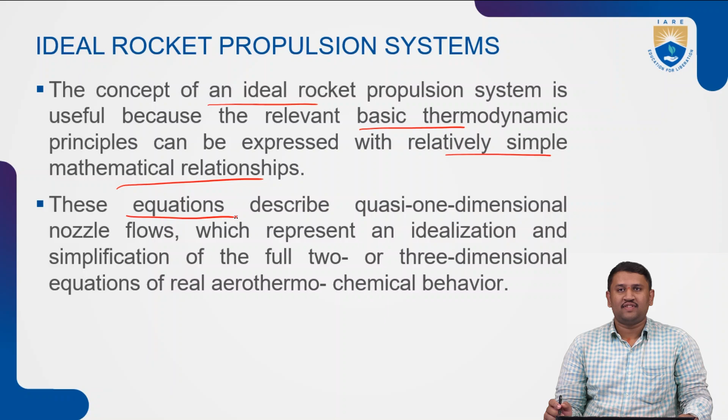Now, these equations which describe quasi one-dimensional nozzle flows, if applied for a nozzle, will describe quasi 1D flows, and which represent a simplified idealization for a full 2 or 3 dimensional equations of real aerothermochemical behavior.

This term is basically air, heat and chemical. We are combining all three separate terms in order to understand the complex nature of your rockets, particularly nozzle reactions or nozzle flows, by considering a 1D state. Now, upon getting a 1D, you can just integrate the same over a period, over a dimension, in order to get a 2 or 3 dimensional equational form.

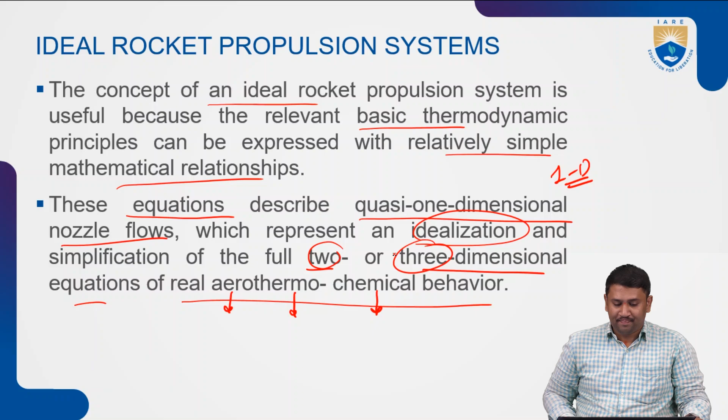Now, first, an ideal rocket, particularly rocket propulsion unit, is defined as one for which the following assumptions are valid. So first one will be the working fluid, which actually consists of chemical reaction products. We are considering a nozzle.

A nozzle in which some flow occurs. Flow is basically of a particular fluid, in our case a gas. Now gas, if you are breaking up clearly in more realistic way, a gas is nothing but my exhaust products.

Particularly chemical reaction products. So now the working fluid, particularly the chemical reaction products, should be homogeneous in composition. It means the composition around the section of a nozzle, or the area through which we are considering, should be the same.

Next, all species of the working fluid are treated as gaseous. Any condensed phase, particularly liquid or solid, adds negligible amount of total mass. Now, the working fluid in our case, which is nothing but our chemical reaction products, is considered as gaseous phase because upon combustion they are high pressure plus high temperature gases which are expelled through the nozzle, or expelled from the combustion chamber.

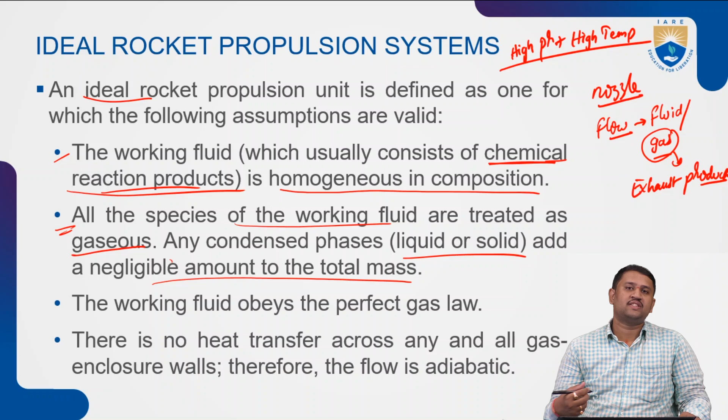Now, upon combustion, these products, particularly the fuel, whatever fuel you are using, for example liquid hydrogen or jet propellant or any other, and the oxidizer, particularly oxygen, both upon combustion will convert themselves into gaseous form. This gaseous form is a valid assumption that we are making for considering an ideal rocket propulsion.

Next, and one more thing, if any condensed phase occurs, for example, any certain combination of rocket fuel, particularly liquid oxidizer as well as fuel, will be giving out some amount of condensed phases like liquid or solid phases of the material. So that will be considered as only a negligible amount to the total mass or total exhaust products that are being generated.

Next, the working fluid, in our case the combustion reacting products, must obey the perfect gas law accordingly.

Next, there is no heat transfer across all gas enclosure walls. Therefore, the flow is adiabatic. Adiabatic, in our terms, is basically there is no exchange of heat.

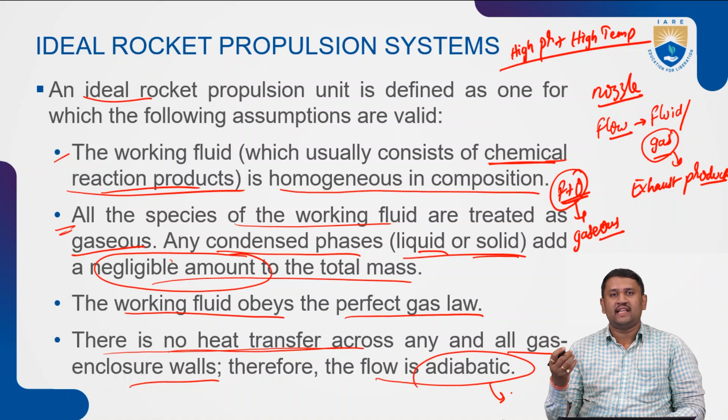Now, let us consider a simple example. In a simple nozzle, while performing 1D analysis, we are not considering the material through which the nozzle is made, but we are assuming that there is no heat transfer taking place, so that whatever energy is created at the beginning of the combustion chamber or beginning of the nozzle is the same at the end of the nozzle also.

Coming to the next assumption: there is no appreciable wall friction, and all boundary layer effects may be neglected. There are no shock waves or other discontinuities within the nozzle flow. Whatever shock waves are there, are formed outside of the nozzle in general, whereas the discontinuity is the only one formed while creating a CD nozzle.

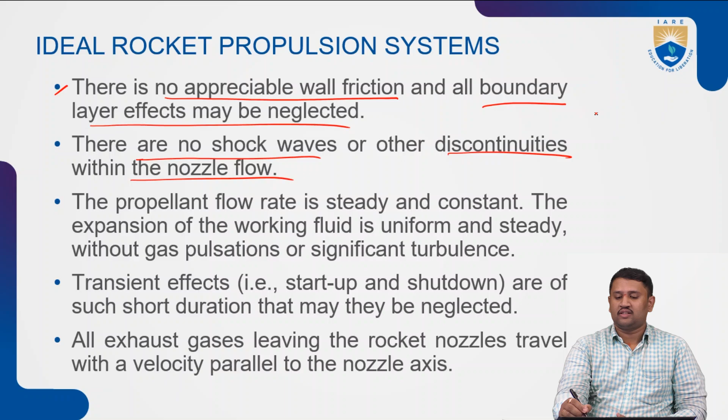A single discontinuity, called the throat, will be available in order to maximize my flow velocity. Regarding maximization of flow velocity, we have discussed already in the previous class. So next, continue with the same.

The propellant flow rate, which is steady as well as constant, and the expansion of the working fluid, particularly the chemical products, must be uniform and steady without gas pulsations or any turbulence. Starting from the nozzle, the flow should be continuous. There should be no intermediate stop, no sudden pulses of gas injection or gas modification.

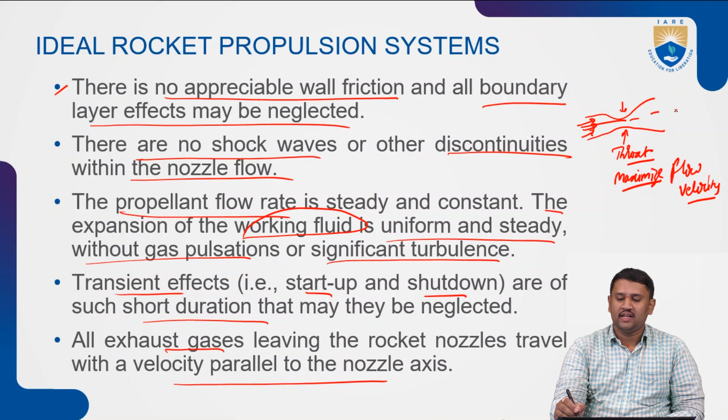Next, the transient effects, particularly during startup and shutdown, are of such short duration that they have to be neglected. All exhaust gases leaving the rocket nozzle travel with velocity parallel to the nozzle axis, and this will be my nozzle axis.

Now, few more assumptions: the gas velocity, pressure, temperature and density are uniform across any section normal to the nozzle axis. For example, if you're considering this as a CD nozzle...

This is the flow. Now, during this flow, what happens? Basically, the gas velocity, pressure, temperature and density are all uniform across any section normal to the nozzle axis. If you're taking n number of sections anywhere, the values of velocity, pressure, temperature and density are the same. That we are assuming.

Next, the chemical equilibrium. The chemical equilibrium is established within the preceding combustion chamber, and the gas composition does not change in the nozzle, which also means the frozen composition flow.

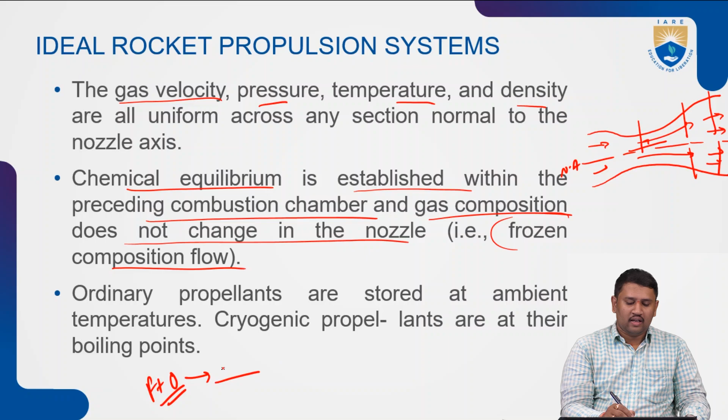Now, whatever the chemical equilibrium is—whatever fuel plus oxidizer we are burning, any kind of fuel and liquid oxygen—upon burning you will be getting certain amounts of products, particularly NOx products, sulfur products, CO, and a few more others.

When upon combustion of fuel and oxidizer, whatever composition you get as a byproduct of the combustion, that remains the same throughout the complete nozzle system. The gas composition, particularly this product, will be the same according to the length of the nozzle. It means there is no change—whatever you are getting out of the combustion is directly sent out through the nozzle as part of expansion. This particular flow is called frozen composition flow.

Now, one more assumption that we are making is ordinary propellants. Ordinary propellants are stored at ambient temperatures, whereas cryogenic propellants are at their boiling points. Let us understand this.

Any propellant, particularly fuel plus oxidizer, can be stored at their respective storage points, before their evaporation or boiling points. Whereas cryogenic propellants, let's say liquid hydrogen as well as oxygen—we'll skip oxygen for now—hydrogen is a type of cryogenic propellant which is at gaseous state at ambient temperature.

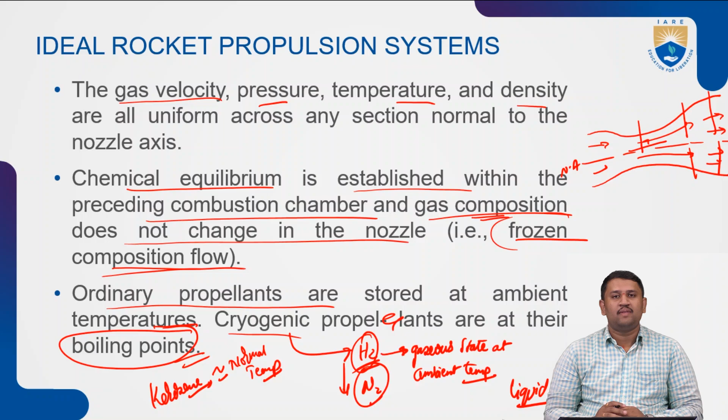Can be stored easily, whereas cryogenic propellants required a special area, special casing to hold them together at a specified temperature well below their respective boiling points. Now, based on these assumptions, we can derive a relatively small, quasi one-dimensional set of equations in order to determine our flow.

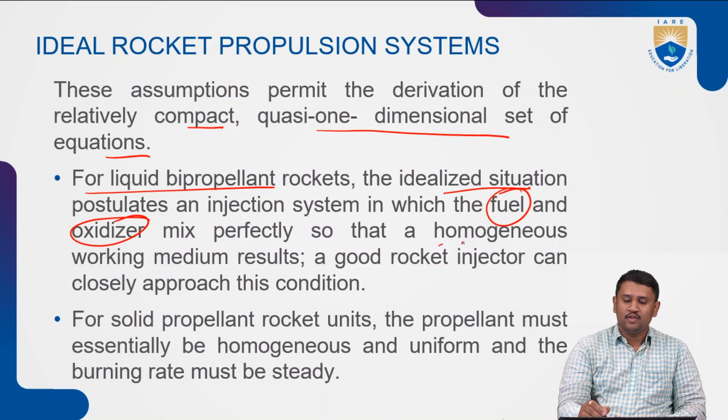For a liquid propellant or bipropellant rocket system, an idealized situation postulates an injection system in which fuel as well as oxidizer mix perfectly, meaning the proportions are in stoichiometric form, so that a homogeneous working medium results. A good rocket injector can closely approach this condition. Getting a good stoichiometric ratio is feasible, but getting a good homogeneous working medium, particularly of the exhaust products, is somewhat harder. So the way you inject the fuel and oxidizer, and at what angle, determines how closely you approach the required condition.

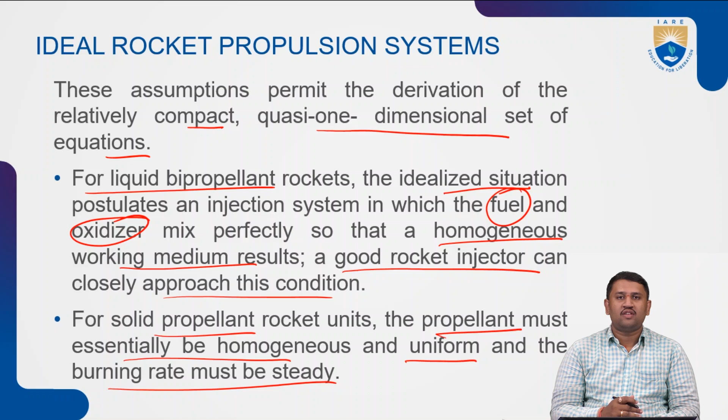Whereas for solid propellant rocket units, the propellant must essentially be homogeneous as well as uniform. The burning rate must be steady in order to have a constant flow of exhaust products through the nozzle.

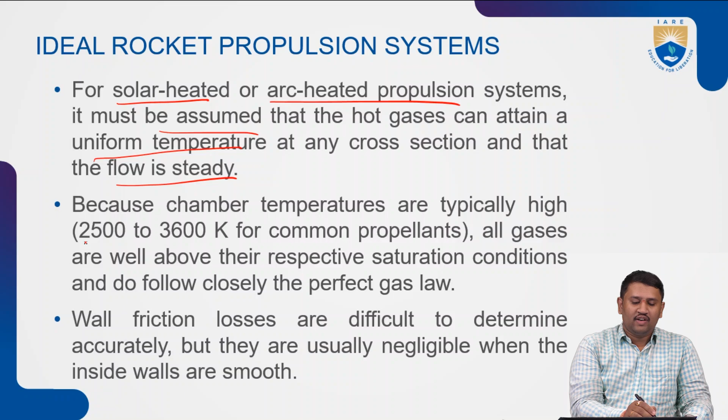Now, similarly, for any solar heated or arc heated propulsion systems, which are the trending technologies now, it must be assumed that the hot gases can attain a uniform temperature at any cross section if the flow is steady, because the chamber temperatures are typically 2500 to 3600 Kelvin for common propellants, and all gases above their respective saturation conditions will follow the perfect gas law.

Wall friction losses are difficult to determine accurately but they are usually negligible when the inside of the walls is smooth. If we are designing the walls of a nozzle to be serrated or curved in nature, then we must consider the wall frictional losses.

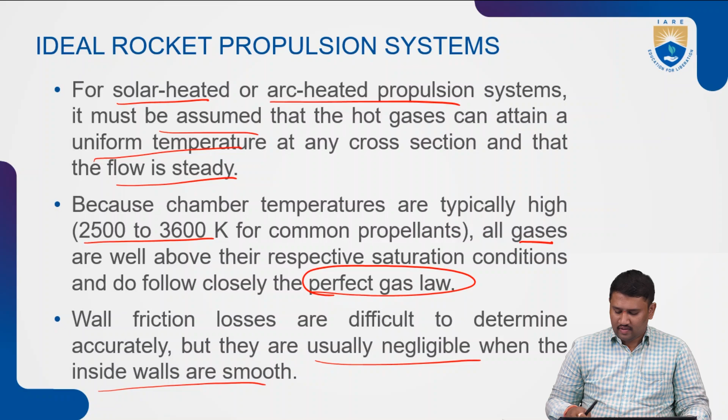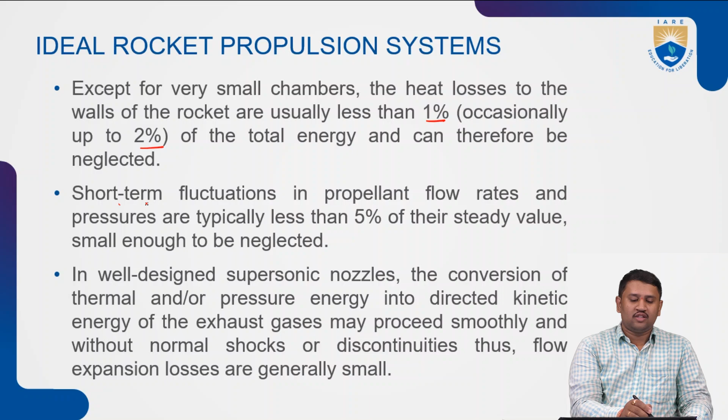Now, except for very small rocket chambers, the heat loss through the walls is usually less than 1%, occasionally up to 2%, of the total energy and can therefore be neglected. Short-term fluctuations in propellant flow rates, typically less than 5% of the steady value, are small enough to be neglected. In a well-designed supersonic nozzle, the conversion of thermal or pressure energy into directed kinetic energy of exhaust gases may proceed smoothly without normal shocks or discontinuities. Thus, flow expansion losses are generally small.

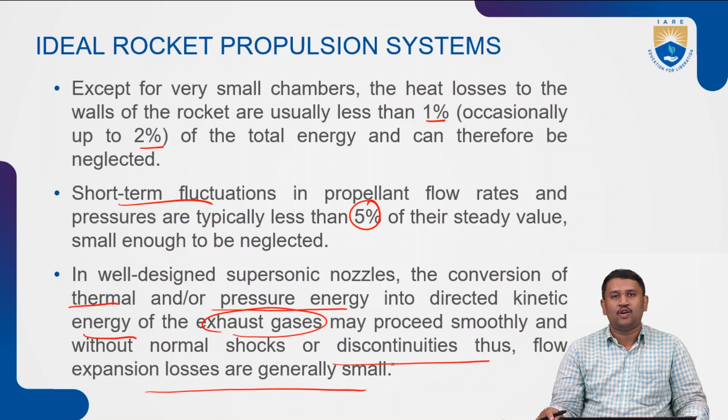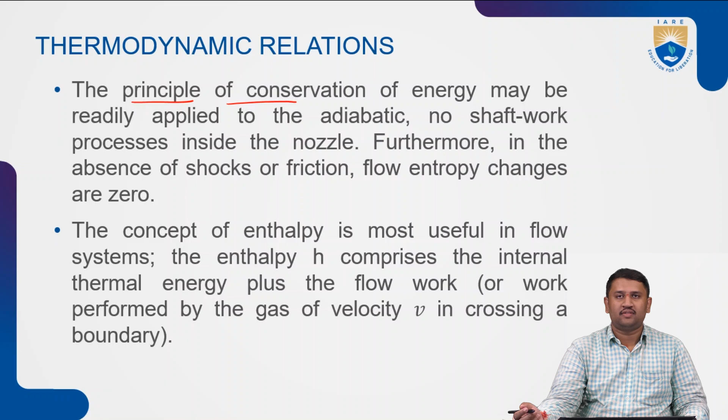Now, continuing, we will glance at the thermodynamic equations and relations in order to determine isentropic flow through the nozzle. First we will understand the conservation forms, then derive the equation. Considering the principle of energy, readily applied to an adiabatic process, which is one of our assumptions, where no shaft work occurs inside the nozzle, and furthermore in the absence of shocks or friction, the flow entropy change is zero.

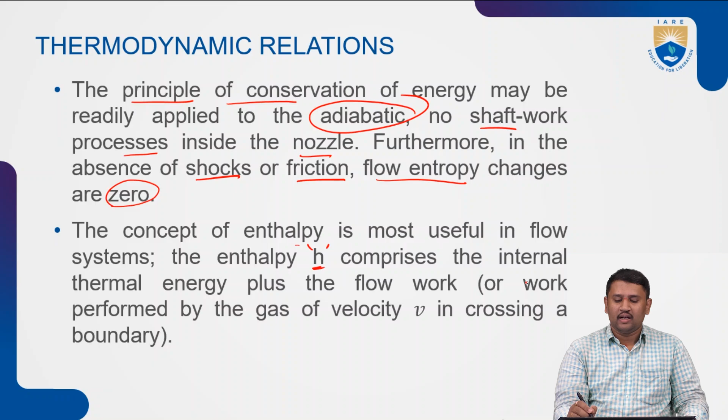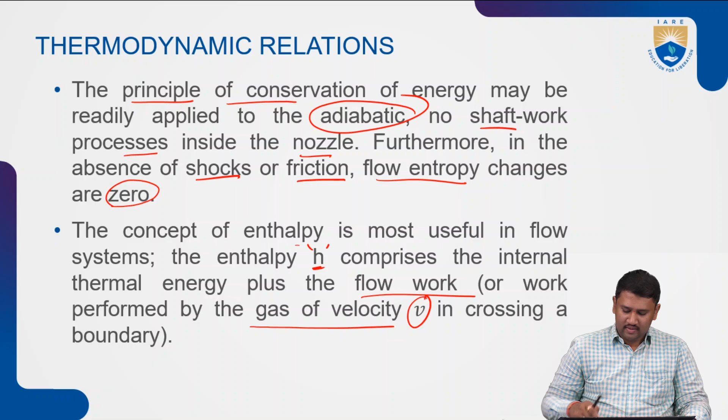Now, the concept of enthalpy is most useful in flow systems. The enthalpy H comprises the internal thermal energy plus the flow work, the work performed by the gas velocity in crossing the boundary. For ideal gases, the enthalpy can conveniently be expressed as the product of specific heat Cp and absolute temperature, where Cp is the specific heat at constant pressure, also defined as the partial derivative of enthalpy with respect to temperature at constant pressure.

Now, under the above assumptions, the total or stagnation enthalpy per unit mass, denoted by H naught, remains constant: H naught equals H plus V squared by 2J, which is again constant. Here H naught is the stagnation enthalpy, H is the simple enthalpy, and V squared by 2J is nothing but half V squared into J, which is the kinetic energy being generated.

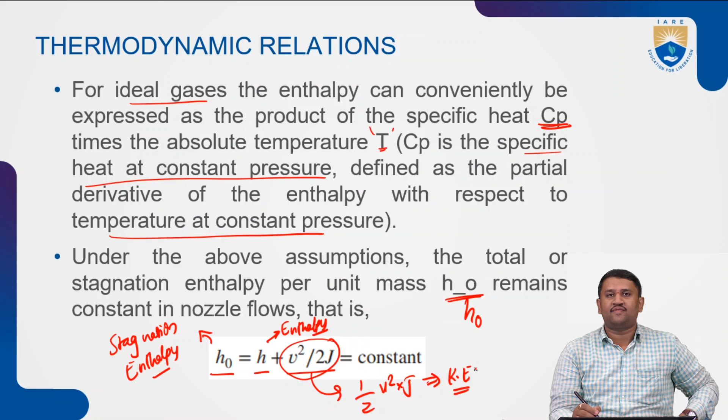Now, by considering the conservation of energy applied to an isentropic flow between any two nozzle axial sections, X as well as Y, the decrease in static enthalpy or the thermodynamic content of the flow appears as the increase in kinetic energy, since any changes in potential energy may be neglected. So differentiating, or taking a small difference between the enthalpy at section X and Y, what do we get? The change in kinetic energy, let me explain.

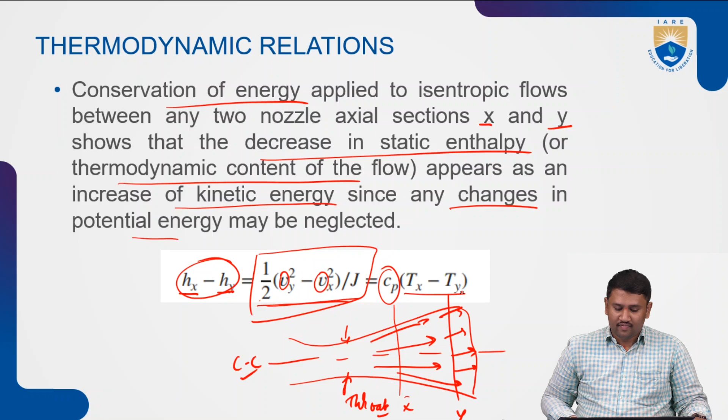Now, the principle of conservation of mass in a steady flow for passages with a single inlet and a single outlet is expressed by equating the mass flow rate m dot at any section X to any section Y. This is known as the mathematical form of the continuity equation.

Now let's understand this. As per the principle of conservation of mass, whatever mass enters through section X, the same mass is supposed to exit section Y, which is nothing but a form of continuity.

Now, in what way it changes, we will see. This can be written in terms of the cross-sectional area and the velocity at which it is passing through, and the specific volume, meaning volume divided by mass at any section. The mass flow rate at section X should equal that at section Y, which is also equal to AV by V, where A is the cross-sectional area, V is the flow velocity, and capital V is the specific volume.

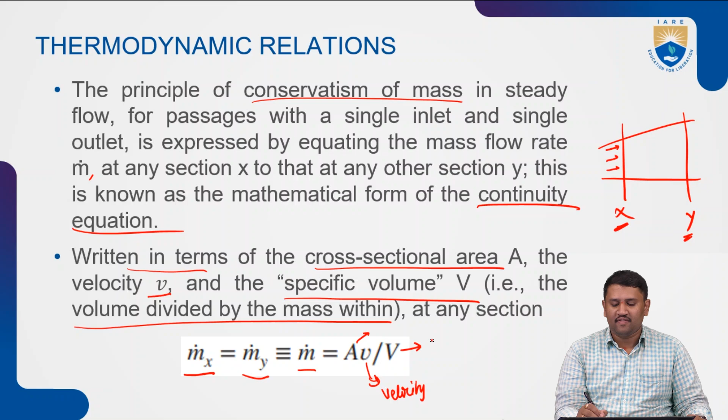Now, the perfect gas law can be written at an arbitrary location as PV equals RT, where R is the gas constant, found from the universal gas constant R dash divided by the molecular mass of the flowing gas mixture. The molecular mass of the flowing gas depends on the products of combustion. R is constant, R dash is constant. Now what varies? Basically the pressure, the volume, and the temperature.

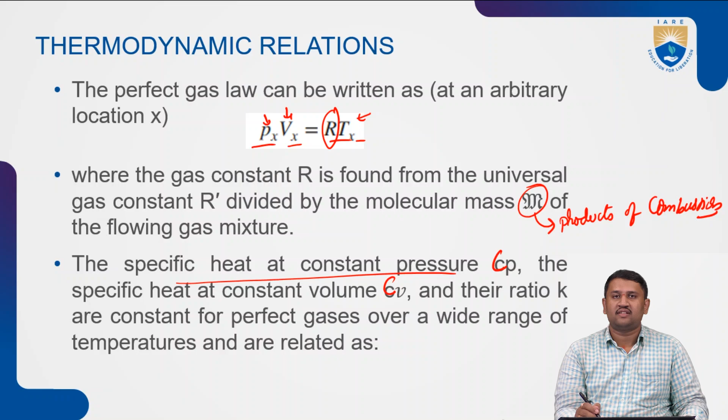Now, the specific heat at constant pressure, denoted by Cp, and the specific heat at constant volume, denoted by Cv, and their ratio K, are constant for a perfect gas over a wide range of temperatures, related as K equals Cp by Cv. Again, rewriting this, Cp minus Cv equals R by J, or Cp equals KR by K minus 1 into J.

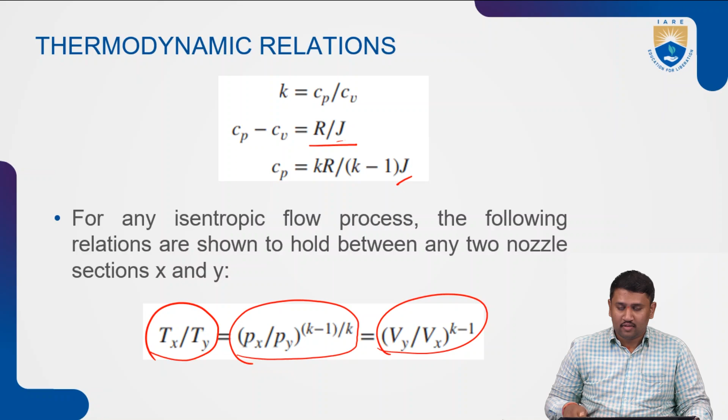For any isentropic flow process, the following relations hold between any two sections of a nozzle: the temperature ratio for two separate sections equals the pressure ratio, which also equals the specific volume ratio. These relate any two sections of a nozzle, taken from the above equations. Now rewriting the same, during isentropic expansion, the pressure drops, and the absolute temperature also drops somewhat less, so the specific volume increases when flow is expanded isentropically.

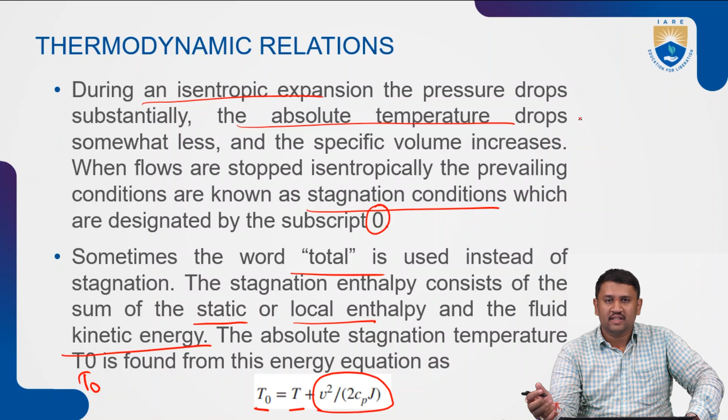Then the prevailing conditions are known as stagnation conditions, designated by subscript 0, and sometimes total is used instead of stagnation. The stagnation enthalpy consists of the sum of the static or local enthalpy and the fluid kinetic energy. The absolute stagnation temperature, T naught, is found from this energy equation, equals T plus V squared by 2 Cp J. Now let me glance at this data. You will be having a generalized condition, particularly temperature. In any isentropic expansion, what happens?

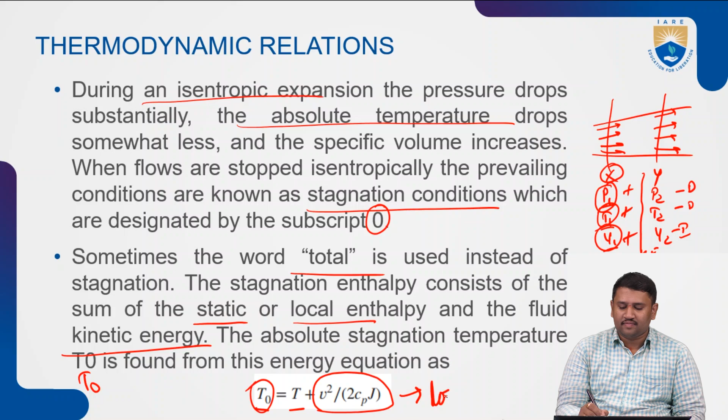In our case, for example, T naught can also be called as stagnation temperature or the total temperature at a particular location. And similar to this, T is my static absolute fluid temperature, and in adiabatic flows the stagnation temperature remains constant. And a useful relationship between the stagnation pressure and the local pressure in isentropic flows can be written as P naught by P is equals to.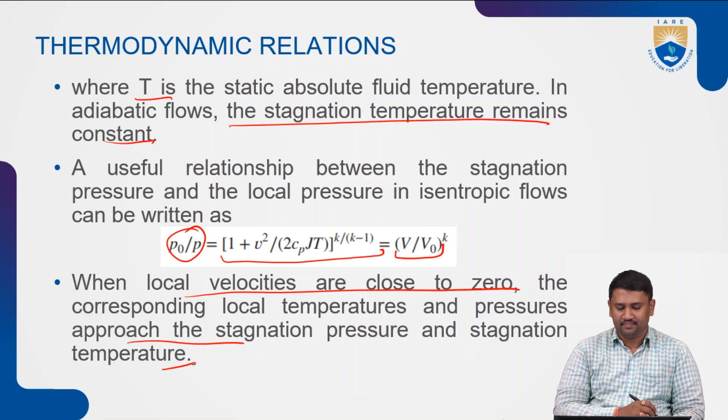Now, inside the combustion chamber, where gas velocities are typically small, the local combustion pressure is essentially equal to the stagnation pressure. Now, the velocity of sound, also known as the acoustic velocity, in perfect gases is independent of the pressure.

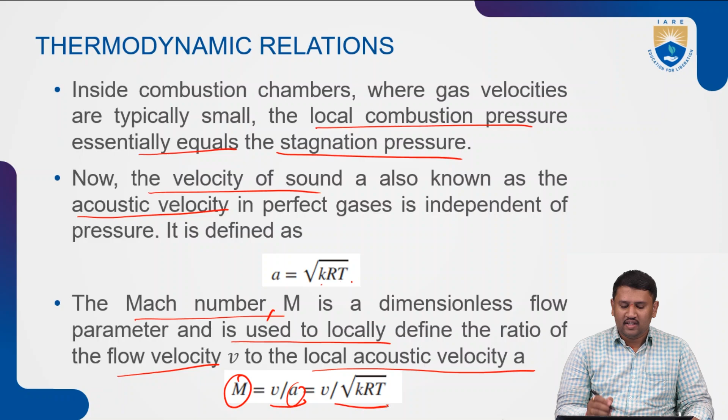This is also defined as A equals to root of KRT, where a Mach number M is a dimensionless flow parameter and is used to locally define the ratio of the flow velocity and local acoustic velocity, which is denoted by capital M equals V by A, where A, again the acoustic velocity, is rewritten in terms of square root of kRT.

Now, Mach numbers less than 1 correspond to subsonic flows, whereas Mach numbers greater than 1 correspond to supersonic flows, and the flows that are moving precisely at the velocity of sound would have Mach number equal to 1. At the throat of all one-dimensional supersonic nozzles, the Mach number must be equal to 1.

The relation between the stagnation temperature and Mach number can also be rewritten as T naught equals to T into this bracket form, where we are substituting the data towards your stagnation temperature.

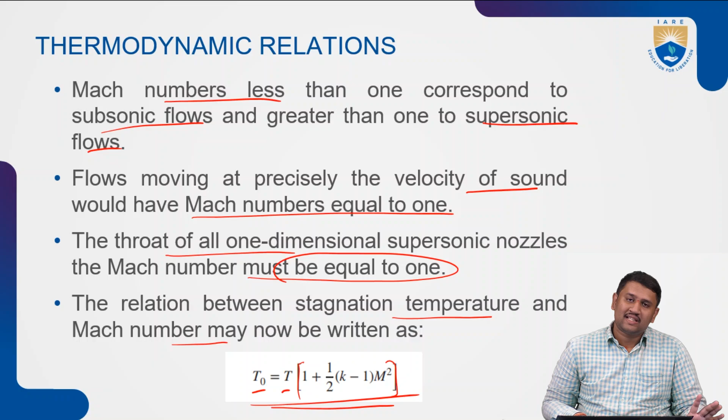Now, the previous equation in terms of this can also be rewritten to find out the Mach number as square root of 2 by k minus 1 into T naught by T minus 1, where T naught and P naught are designations of your temperature as well as pressure stagnation values, or the total values.

Unlike the temperature, the stagnation pressure during the adiabatic nozzle expansion only remains constant for total isentropic flows. It means there are no losses of any kind. It can be computed from P naught equals to P in this form.

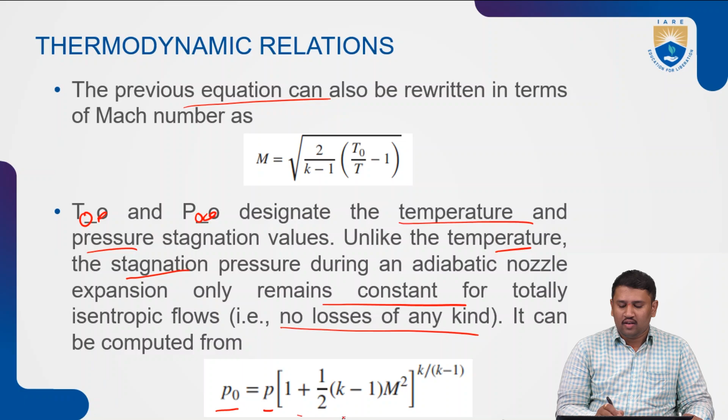Now, the nozzle area ratio, which we discussed earlier, for an isentropic flow may now be expressed in terms of Mach numbers for two arbitrary locations, that is x and y, within the nozzle, and such relationships are plotted with mx, that is Mach 1, where ax is nothing but the throat or the minimum area along with the corresponding ratios T by T naught and P by P naught.

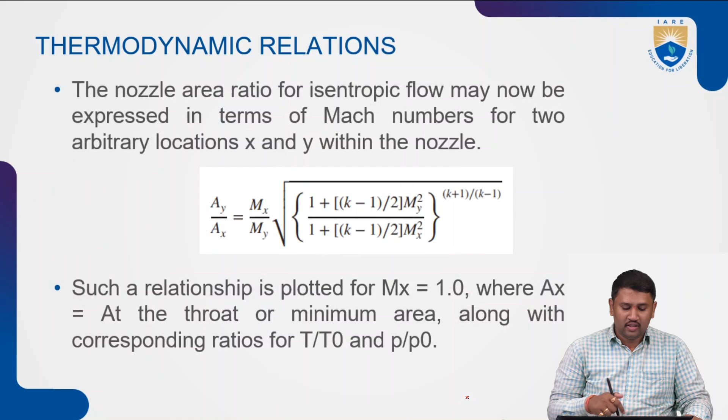Now, this is one of the plots that is being plotted with respect to this to find out. This graph shows the area ratio, particularly AX by AY, the pressure ratio P by P naught, and the temperature ratio T by T naught as functions of Mach number. It means M equals mx by my.

Now what happens under this? Mach number 1, what we have studied till now, any Mach number below 1 will be considered as subsonic, above as supersonic. Now understanding this, Mach 1, which is the maximum amount of flow, that occurs only at the throat.

Now try to understand, this particular region separates my sonic sections, particularly the CD nozzle, into a convergent section and a divergent section. Now in this case, what we'll see is basically first we'll understand the area ratios.

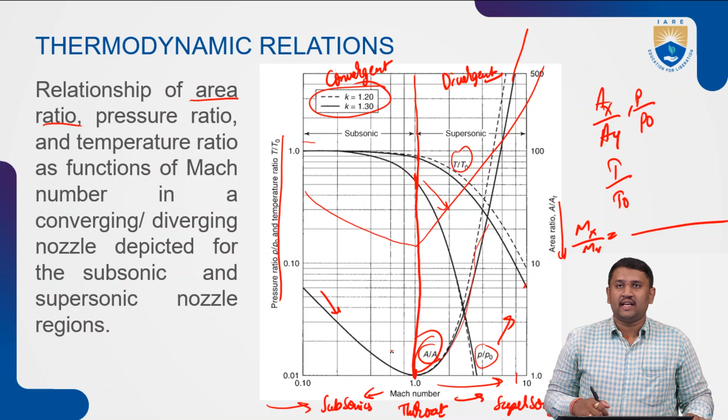Now coming to your velocity, if you are able to plot on the same thing, what happens? Particularly kinetic velocity, there will be a small velocity increase, and a gradual increase of velocity right after the throat, as the area ratio goes on increasing.

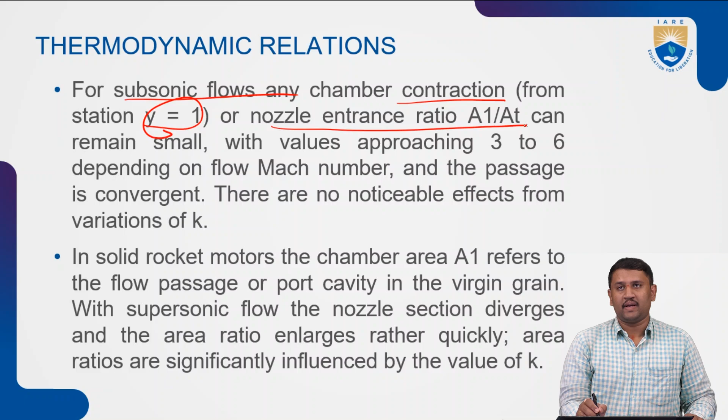Now, for subsonic flows, any chamber contraction which varies from Y1, or the nozzle entrance ratio A1 by AT, can remain small, with values approaching from 3 to 6 depending on the flow Mach number, and the passage is convergent, which has no noticeable effects from the variation of K.

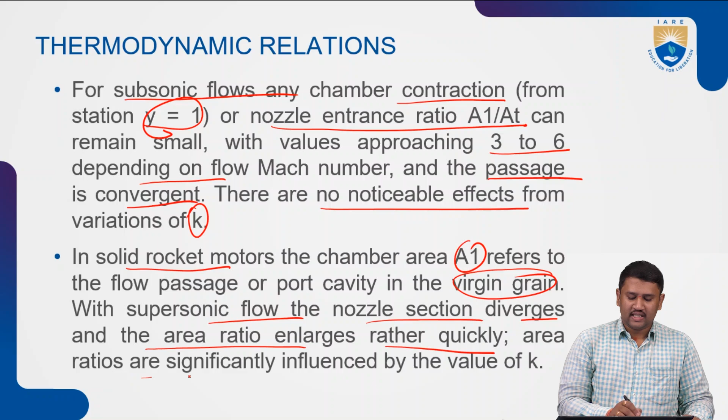Similarly, for rocket motors, the chamber area, that is A1, refers to the flow passage or the port cavity in the virgin grain. With the supersonic flow of the nozzle section, which diverges, the area ratio also enlarges, but rather quickly. The area ratios are significantly influenced by the value of K.

And at Mach 4, the exit ratios, particularly A2 by AT, which range between 15 to 30, are depending on the value of K which has been indicated. But on the other hand, the pressure ratios are less sensitive to K, but temperature ratios show more variation.

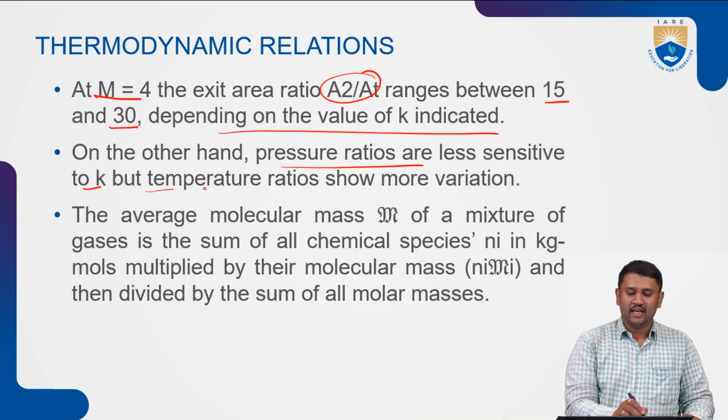The average molecular mass, which is denoted by M, is a mixture of gases and is a sum of all chemical species in kg moles. It's again multiplied by molecular mass, will give you this, and is divided by the sum of all molar masses.

So till now what we have studied is basically all the thermodynamic relations that are equivalent, dependent or needed in order to understand the nozzle flow characteristics as well as the nozzle flow. Now in the upcoming class, what we will be discussing is basically the isentropic flow, and we will try to understand what are the factors that are needed and what are the factors available or dependent to determine the exhaust nozzle flow.